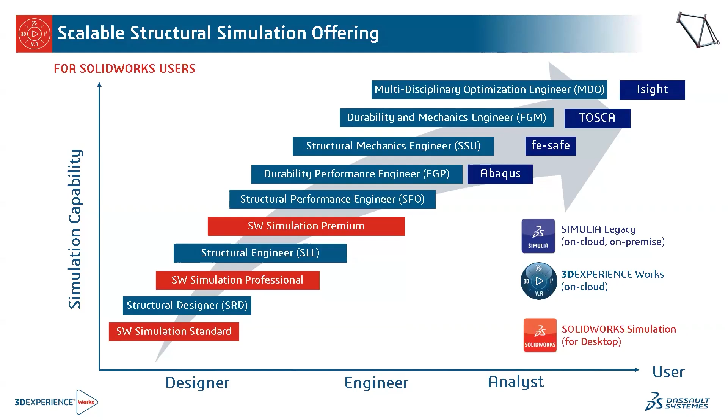So durability simulation is contained in a role that is among the strongest structural simulation capabilities. If you're familiar with SOLIDWORKS Simulation Premium, then this role is at the premium end of Simulia's portfolio, analogous to that, with a more robust set of tools, elements, kinds of simulation, and computation alternatives.

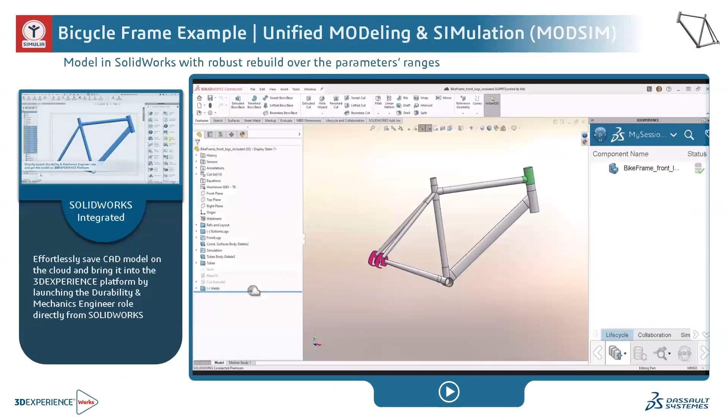So to begin with, I'll just go into SOLIDWORKS a little bit. Here I'm using the rollback bar on a SOLIDWORKS model to show the history-based parametric solid modeling. One thing in particular to democratization is preparing your SOLIDWORKS model for robustness over the range of values available to users. I'm clicking on this thicken feature just to show that I'm creating the gusset from the tube surface there. Just rolling it forward.

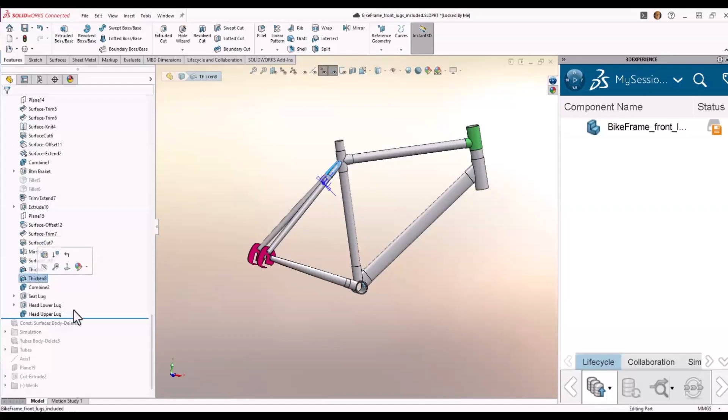So I've also got a layout sketch here that is sort of the skeleton of the rest of the model. And I've used this in my model to basically make it easy to find everything so that everything I want to change is in one place. And that way, when I want to test for robustness, testing the dimensions values through their extrema, so that my geometry always rebuilds, is a big takeaway from this. And you can avail yourself of the parametric solid modeling strength of SOLIDWORKS to accomplish that robustness.

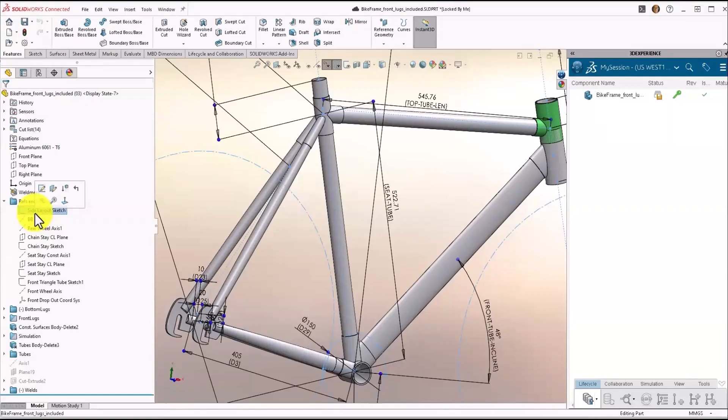I will suggest one possibility is to use a design table to quickly identify the coordinates of values that cause the geometry to fail at first, and then from there resolve so the model behaves as predicted over the range of the parametric values.

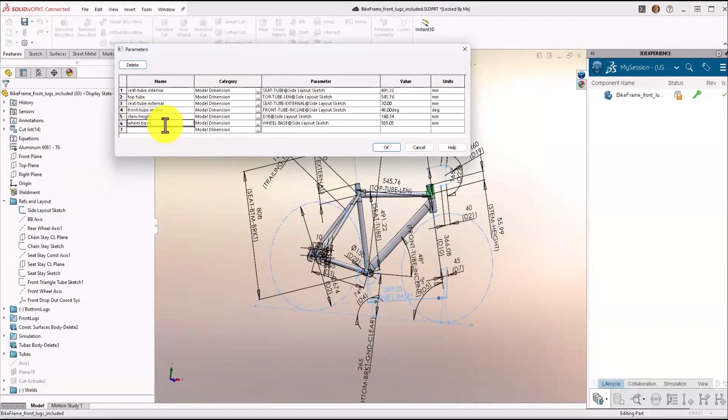And then from the equations object of the tree, I've gotten into the parameters dialog to basically add parameters and associate those parameters to the dimensions so that when you make a change to a parameter's value, the dimension changes and the dimension drives the geometry change.

And just to note, the integration to the platform is within SOLIDWORKS. So it's very easy. You don't have to worry about creating STEP files or things like that. And you'll get the geometry into the platform, and a change made in SOLIDWORKS can be cascaded very rapidly into the platform. So changes are totally associative.

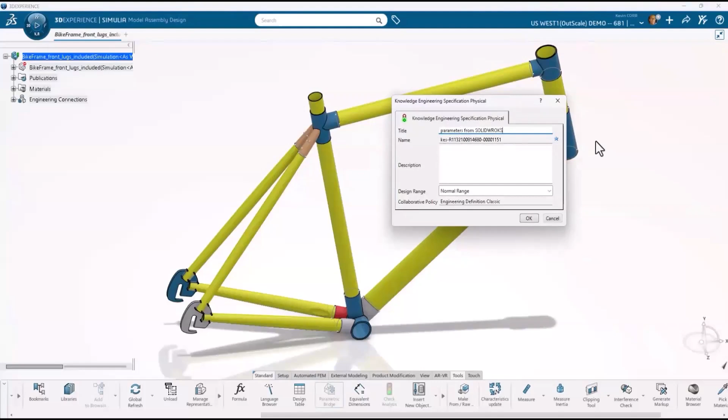And not only are they associative, but they're also bidirectional, so that using this parametric bridge, I can create a little knowledgeware object, as it's called, on the platform, to basically keep the parameters in the specification tree over at the left. So as I finish correcting my spelling, there's my object over in the upper left.

You can see there as I expand the relations in the parametric list there. And I can come in and just maybe add a range to the parameters so that the user knows what the range is and they can easily stay within that range.

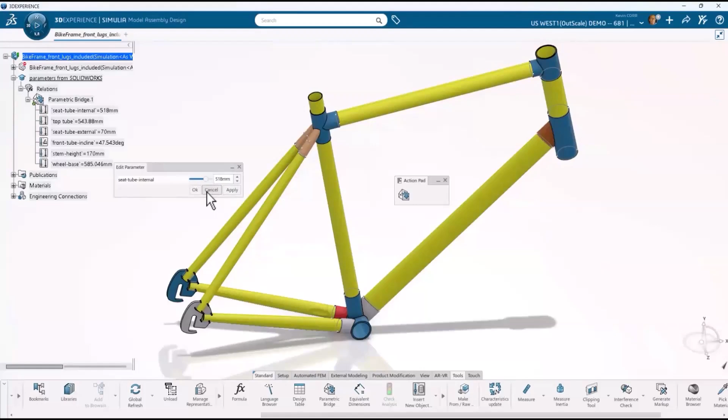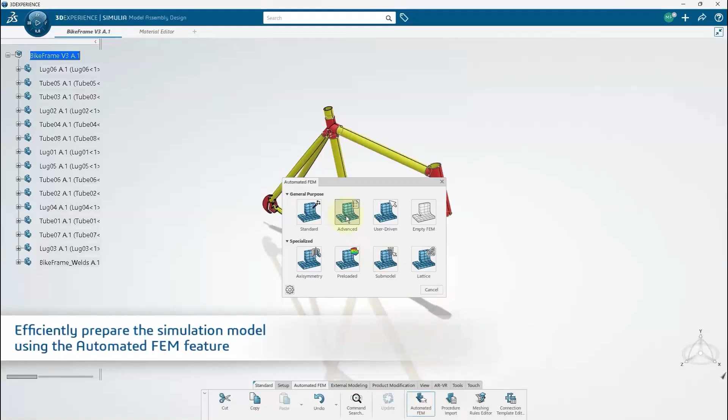So parameters varied by a casual user are easily done in the 3DEXPERIENCE tree. So next, I'll use the power of our automation capability to automate creating the meshes, assigning material properties, and doing the mid-surfacing on which we'll create those meshes. And then we'll put some connectors across those meshes so that you have a weld established.

So here I'm just automating the process of meshing everything by specifying the various parameters. Going to use a surface quad element topology. And there's my mesh. So automatically create mid-surfaces and meshes for quick simulation model builds.

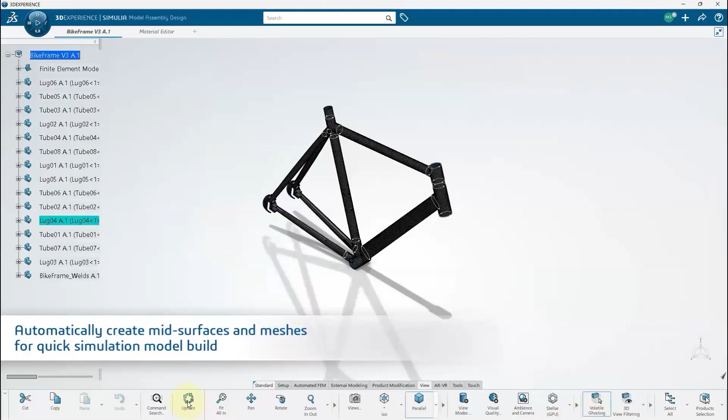Also, mind you that you can basically replicate your meshing wisdom off to your colleagues by allowing them to access your presets, which is a huge multiplier in time savings for them.

And here I'm using our auto detection tool, which allows us to automate the possibilities of creating a connector between the tube and the gusset. And you'll see that it can do many at once.

It's very powerful because it not only allows you to create a weld mesh, but also create the transition zone between the tube and the weld, and then the weld and the gusset, so that it automatically creates a transition zone or a mesh gradient, so that optionally you can have a nice gradient into that weld zone.

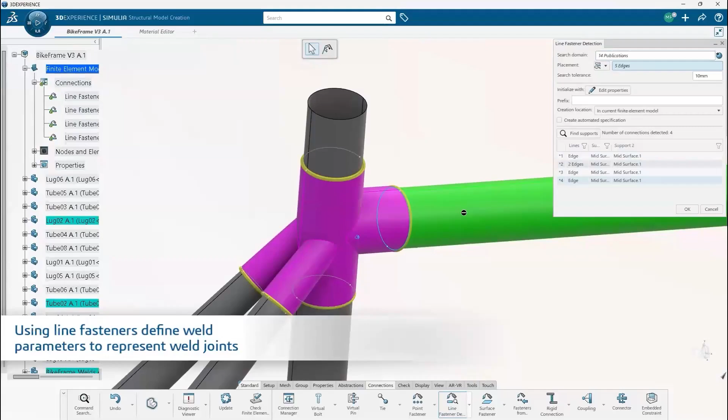So speaking of welds, I thought I'd go into a little bit of detail, not too much, but maybe a minute or so of what is the importance of durability simulation. To understand the importance of durability simulation, I thought maybe we'd take a minute to consider an example published by a car maker at the SIMULIA Customer Conference. Here we're looking at a car suspension knuckle.

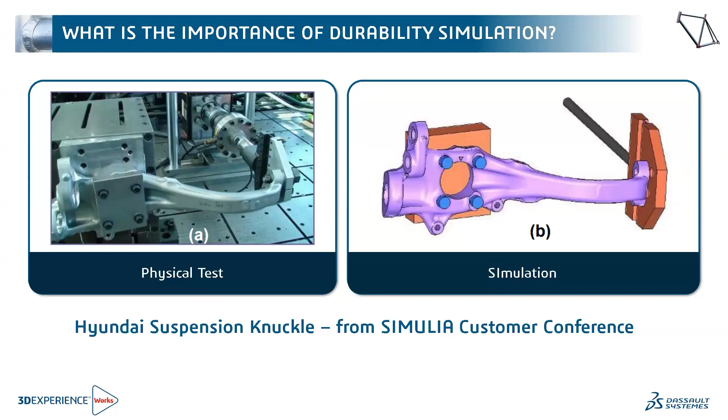Let's compare the failure locations, physical test against simulation results. So in this particular case, the car maker had a low-level loading, presumably to represent the normal expected loads in the road exciting the structure. So in the physical test, the knuckle breaks near the mounting holes. And in the analysis, that same location is predicted. So this would be the location of highest stress.

As a fully reversed loading, this could be predicted just from the strength analysis or the FEA. Then an overload case, presumably to represent an extreme event such as the curb strike, is tested. Repeating this, they get the failure near the mounting bolts in the test, which again is predicted from the analysis. But then they do a single overload before repeating the low-level fatigue again.

At that stage, with everything we know so far, where would we predict the failure? At the mounting location. It's the highest stress location. It has the lowest life in each individual case. So combined, this must be the worst location. However, the car maker knew from their tests that this loading caused failure in the arm away from the mounting locations, a result which cannot be predicted from just the base FEA strength analysis load cases and just combining the damage.

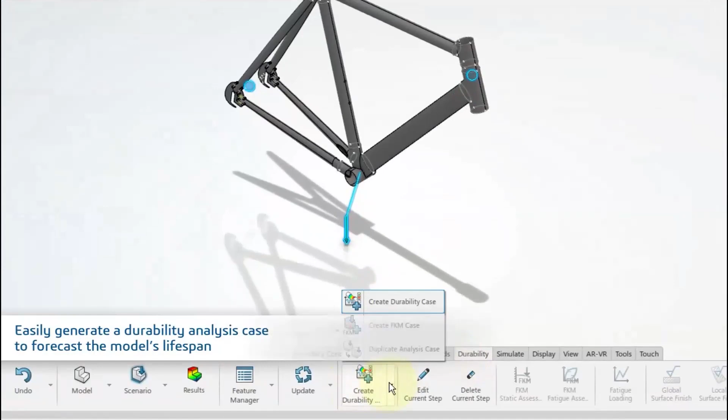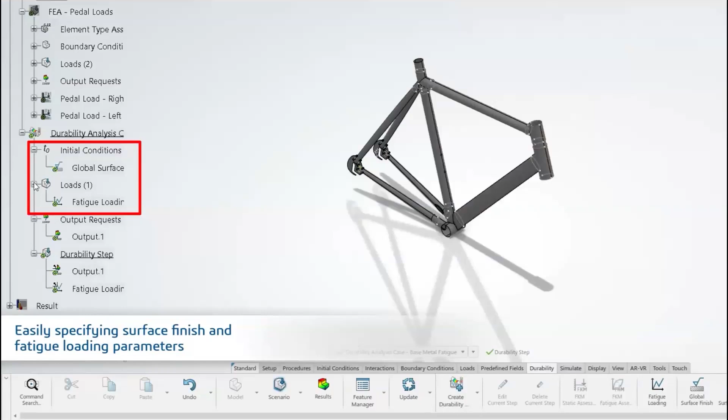So things like surface finish and the sequences to be superimposed are input in the fatigue loading. And by the way, if you have transducer data from measurements using accelerometers and strain gauges, you can import those and they can become references in traceability.

So I'll use base metal fatigue as a guide for identifying areas of interest for downstream weld fatigue. And here's our results for the base metal fatigue. This basically allows you to see at a glance what the expected life is, sort of without using the welds as a topology.

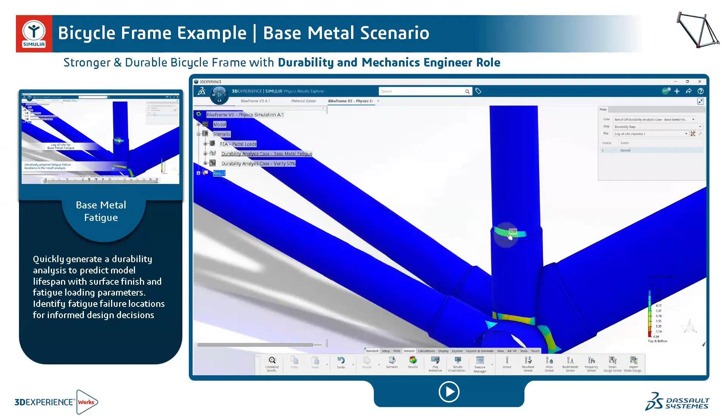But first, let's just explore why do weld fatigue? Well, the reason to do weld fatigue is that the base metal fatigue isn't so conservative as it should be for welds. Welds have a very specific geometry, and so you can get a lot lower fatigue life. So that's why you'd use some sort of code that embraces weld fatigue.

The vast majority of people out there are doing only toe failure analysis driven design. With our roles, you cover all modes of failure.

We assume as-welded, without treatments, in the fatigue curves. So you might do shot peening or something like that. Some of our customers do, and they develop their own SN curves for their own welding processes. If they are routinely grinding the toes, they have proprietary standards that can be used. But out of the box, the assumption is that residual stresses are pretty near the yield stresses, and that means SN curves have near yield built in.

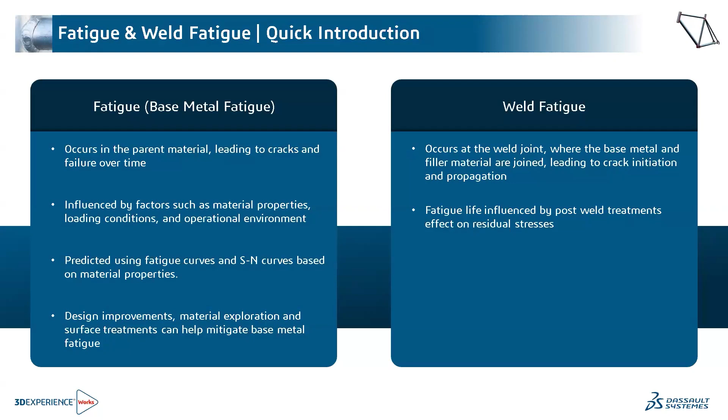Along that line, there are options in our curves available to you for Battelle compressive. So there are definitely—if you want to model right now out of the box, you've got the capability to do weld fatigue comparison against less conservative fatigue curves.

And this just illustrates all the types of failure that you can simulate. What we'll do here basically just picks the lowest life from the analysis and the boundary conditions, and the combination of material distribution and load distribution, to find what the lowest mean fatigue life is for any of these toe failures, fusion, or root, for instance.

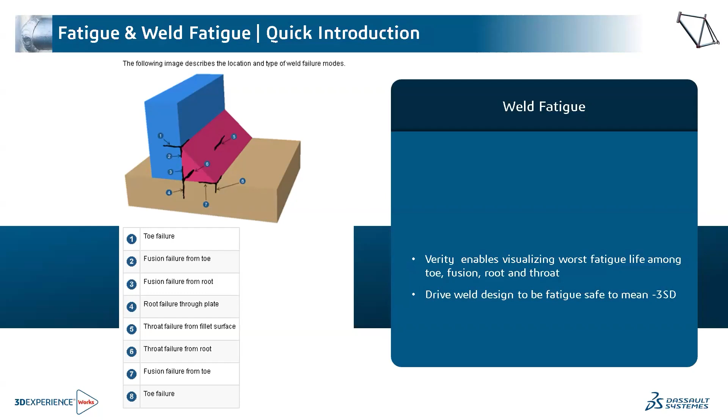And so with Verity, the value of the post-weld treatments can be simulated. Think of comparison of the results, SN curves from Battelle residual compressive stress testing, or get a sustained contrast between life of stitch welds and all the way around welds, for instance. We enable you to design with a basis in simulation of the typical failure modes before committing to welding.

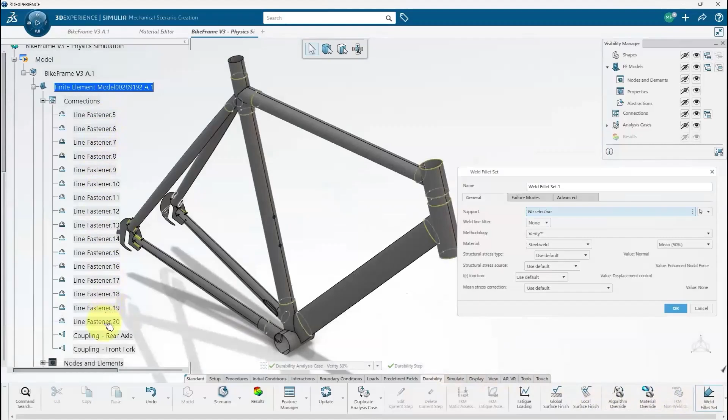I'll go ahead and collect the welds here in the weld fatigue dialog box. So all the welds, all those line fasteners that I created—that's what they're called, the weld connectors. This is also where you can opt to choose from among the ASME or BS7608 or Battelle compressive loading to compare against the combined loading and material distribution that produces the mean fatigue life.

And this is all courtesy of our Verity weld fatigue simulation tool. You can compare here the log of life considering the Verity, and also the contrast between that and a side-by-side comparison with base metal fatigue.

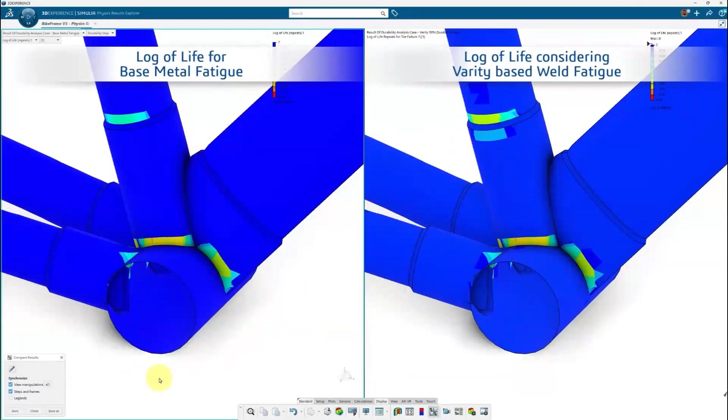This all happens very quickly, especially with this kind of a mesh. It's very suitable for democratization and optimization types of analysis.

This scenario for fatigue simulation is probably somewhat advanced for a casual user to just get done right the first time. Yogesh is eager to show how to put your choice of tuners, sliders, and adjustments to parameters in front of a casual user, making them independent even with this more advanced analysis. So at this point, Yogesh, welcome to the stage.

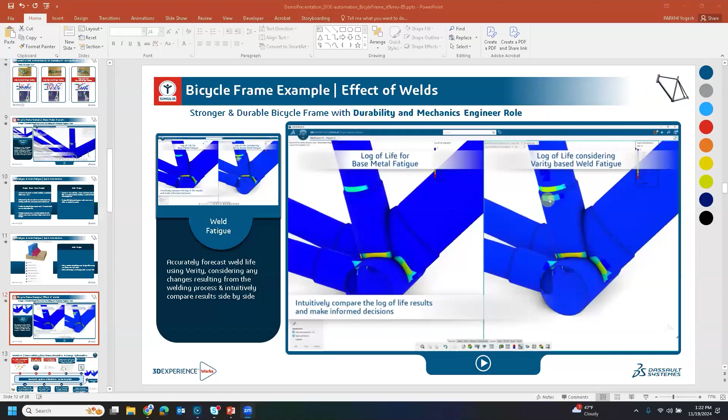All right, thanks for the introduction, Kevin. Let me share my screen. Sure. Okay, do you see the slide in presentation mode? Yes, I do. All right, thank you. Okay, hello everyone.

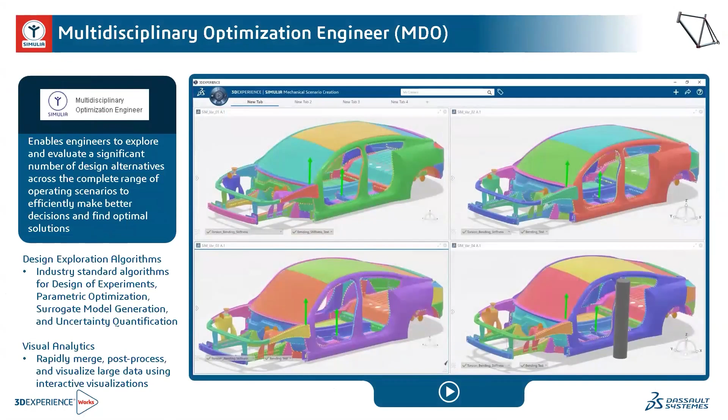Now, just to give you a brief overview of the MDO role, it not only does the simulation automation, but also allows design exploration and optimization to find best design alternatives that meet the product requirements.

We have a variety of industry standard algorithms for DOE and parametric optimization, which enables engineers to systematically explore the design space, perform what-if scenarios, and also find the critical factors or design variables that impact the product performance.

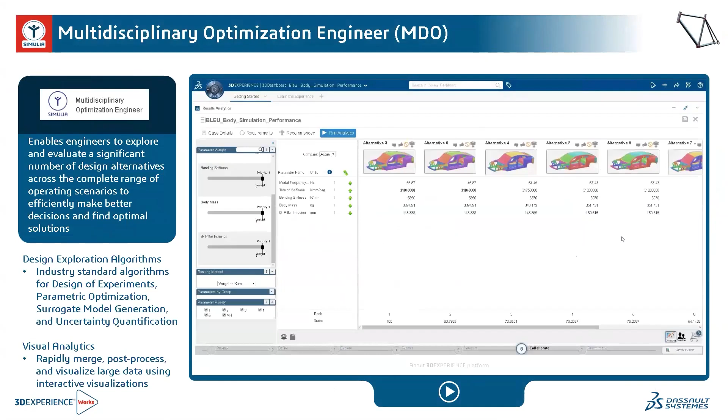And also, as you can see on the screen with the advanced visualization tools, users can rapidly merge, post-process, and interactively analyze large data sets, which helps users to evaluate design options faster and with greater clarity.

Now, to automate the bike frame simulation workflow using MDO role, a simulation expert will first create a template that exposes only the parameters that the designer is allowed to modify, which eliminates the risk of errors.

It's not that if accidentally a non-expert user changes something, that will either give you convergence issues or give you a completely different result.

So with web-based simulation, the simulation expert is kind of making sure that the designer or the user will not accidentally change the parameters or define a value which is kind of out of range.

And once the expert creates the simulation process and develops a web-based template, and once the simulation template is released, a designer will use that template and run a simulation from a web-based dashboard instead of using a native client. And once the simulation is complete, the user can review the results or review the KPIs directly within the web-based app.

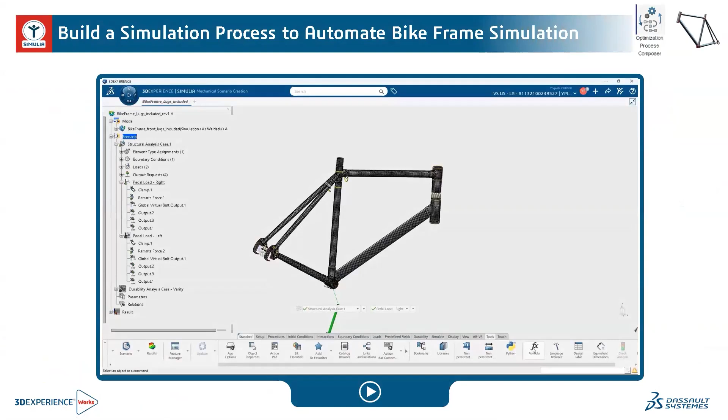So this is the same bike frame that Kevin has used to build his weld as well as the structural scenario. So what I'm going to do is, apart from the parameters that he imported from SolidWorks, I'm going to create two additional parameters: one for the rider weight and other for the tube thicknesses.

So here, as you can see, I have defined a baseline value as well as the range that the designer can play with. So this is the range for the rider weight.

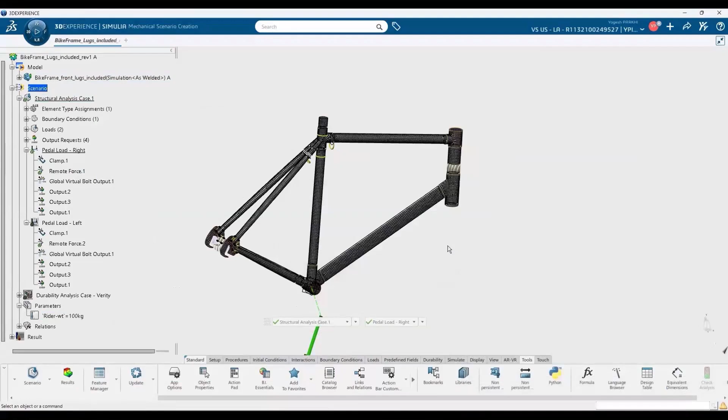And once you create this parameter, you just need to assign that parameter to an appropriate feature. So in this case, I'm assigning that parameter to the load input. And similarly, the tube thickness parameter which I have created here, I'm just assigning to a thickness input in the section definition.

So here I'm just assigning the parameter. Creating the parameter is also very easy on the platform, as you can see.

And once I assign the parameters, I just want to make sure that the parameters that I assign, the simulation is running just fine. So now the simulation is completed.

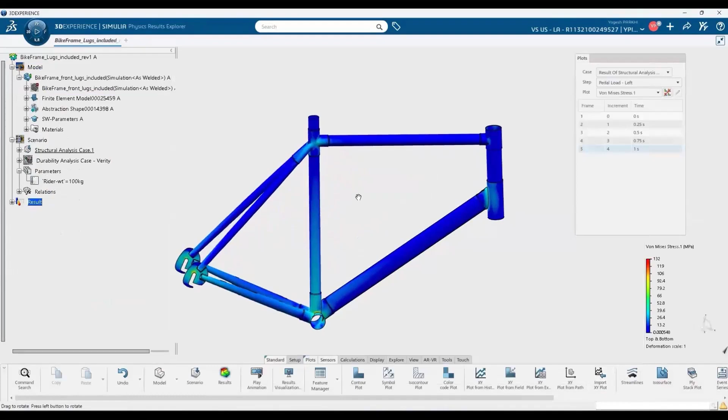I'm going to go to my multidisciplinary optimization engineer role, and I will launch the optimization process composer app to automate the simulation process. Now here, as you can see, building a simulation process is fairly easy.

All I'm doing is just dragging and dropping the physics simulation adapter onto the process. And that's the only component we need to automate the simulation process.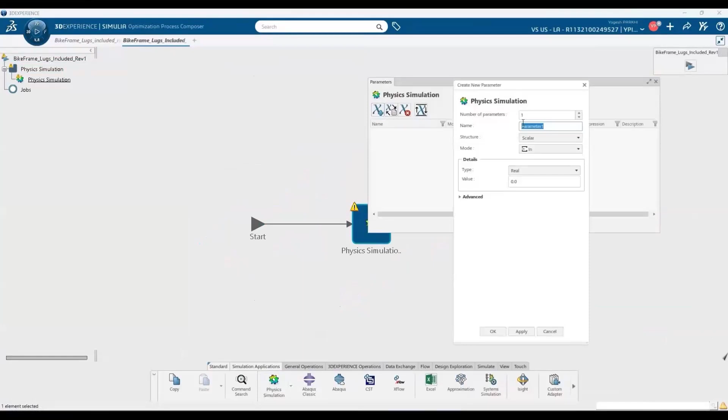So here I'm just creating a parameter which is an object parameter in which I'm going to read my simulation results. So I'm selecting the bike frame simulation.

And now I'm going to edit this physics simulation adapter. Here I'm going to define on how many cores I want to run the simulation.

And here I'm selecting the single solve mode, meaning that I'm going to run the simulation and save the results in this simulation object parameter.

And lastly, I'm selecting upload the images. So all the contour plots such as the von Mises stresses, displacement, or life fatigue life contour plots will be uploaded as a content of this activity. So that's why I'm selecting this upload generated image.

The purpose for doing this is because when the simulation expert is going to create the template later on, he can use these contour plots in the simulation template, so that when the user uses this template, he can dynamically see these results when he runs the simulation.

In the inputs, I'm just going to select my design variables. So here, apart from the parameter which we imported from SolidWorks, I'm going to use one of the parameters, which is the seat tube length. And then I'm going to use tube thickness, and also I have selected the Young's modulus.

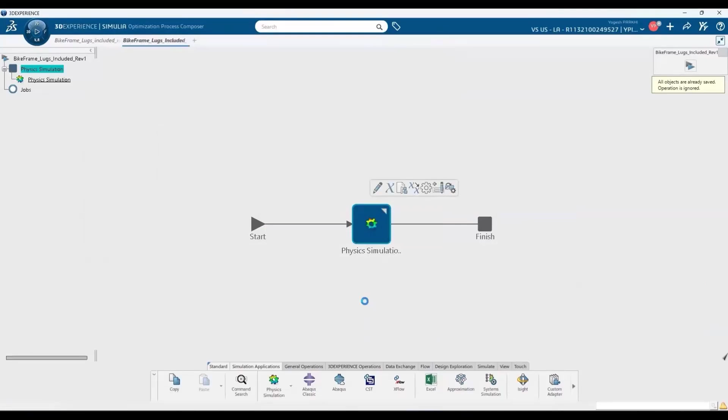And once you set it up, as I said again, all we need is just the physics simulation adapter to automate the simulation process. Also, setting up the adapter is fairly easy. And once you're done with it,

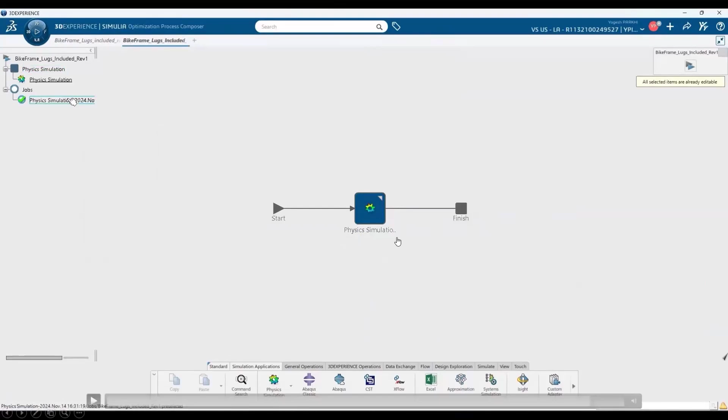I'm just running the simulation process, making sure that my simulation runs fine from the optimization process composer app.

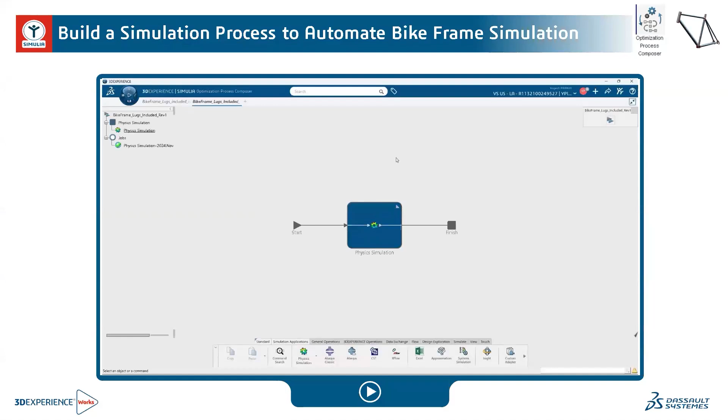Now that we have built the process, the next step for the simulation expert is to create a web-based simulation template.

So in order to create the web-based simulation template, the expert will go to the dashboard, and from the dashboard we will launch the Process Experience Studio app. So here I'm just creating an empty dashboard, and I'm dragging and dropping the Process Experience Studio app, which is required to create a simulation template.

Now here I'm just creating a new simulation template, and as an input, I'm going to use the simulation process that we have just created, using the Process Composer app.

And once we do that, it launches this app where we see all these different components that we can use to create our web-based template.

So here I'm just creating different sections. Initially I'm just using the simulation process name as the title. This is just for the methods developer's reference, meaning that when a designer uses this template and gives any feedback, the methods developer should know which simulation process he has used to create this template.

And then I'm going to use all these different components, like inputs and sliders, to define our design variables. So again, the design variables are the tube thickness and the seat tube length, and here you can see that for seat tube length I have defined the range also. So the user cannot input values greater than 550 or less than 500 millimeters.

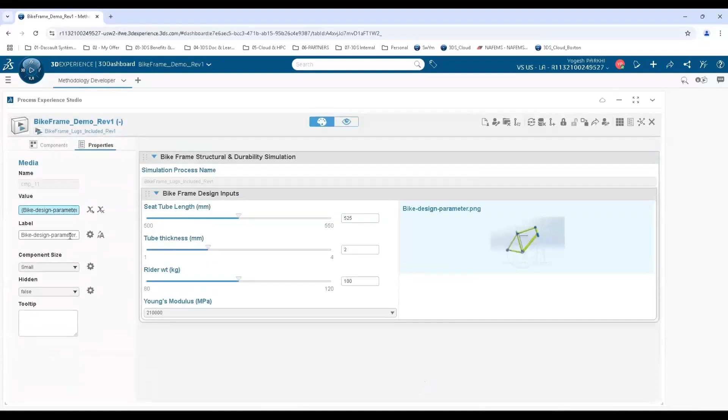And similarly, I have created the parameters for tube thickness, rider weight, and the Young's modulus of the material. After that, I'm going to use the image that I uploaded in the simulation process as content. As you can see, this is the bike design, the bike frame, and it shows what the seat tube length parameter is.

And after that, for the responses, I'm going to use our KPIs, which is nothing but von Mises stresses, the log life, and the bike frame weight.

Now, one thing to note here is that I have set the read-only parameter to true, meaning that the designer or the non-expert user, when he uses this template, will not accidentally put any values here. Since these are read-only parameters, they will only get updated when the simulation process is completed, so the user will not have access to these. The only parameters the user can vary are the 4 parameters that we have defined in the design input section.

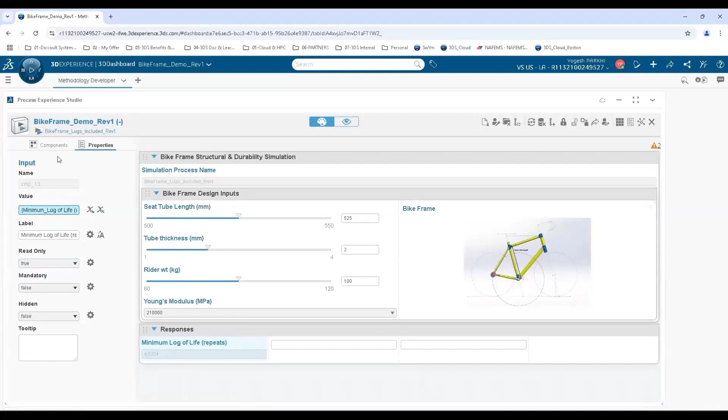So I'm selecting all the responses, and then I'm also uploading the simulation object parameter. This simulation object parameter is nothing but our simulation. Once you run the template, this object will get updated and the user can dynamically view the results in the physics simulation review app. So here, as you can see, I have also uploaded the static images of the different contour plots.

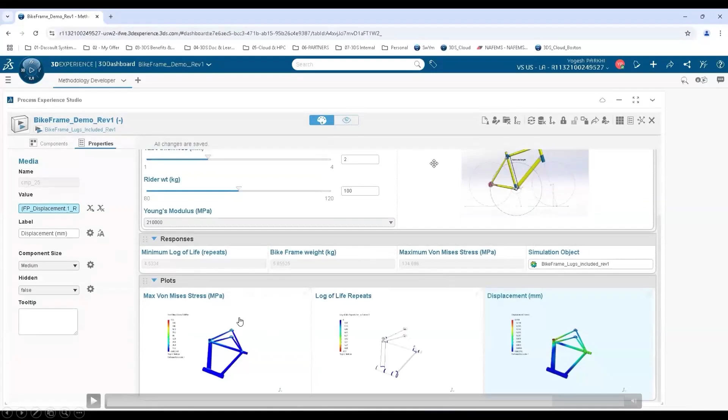And once the developer is happy with the look and feel of the template, he can go ahead and release this template. So I'm just changing the PLM status of this template. And as you can see, once the template is released, the template is now available only as a read-only option. So even the developer cannot make any changes in this template.

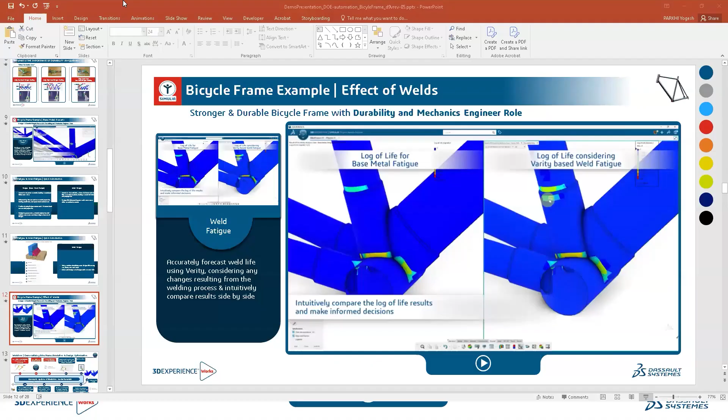Now, once the template is released, I'm wearing the hat of a designer or a user who is going to use this template. So to do that, let me just go to the dashboard where I have created this empty dashboard. And I have these 2 apps, performance study app. So I just drag and drop this performance study app on this dashboard. And similarly, I have the physics simulation review app.

Now, in order to run the template, all the designer will do is just look for the template that the developer has released. So I'm just searching for the template. This is the template. And the user will simply drag and drop this template on the performance study app. So now the template is getting instantiated. And once the template is launched, we can see the template that the developer has created. And we can also see what are the design inputs and the responses. So here you can see that the template is instantiated successfully.

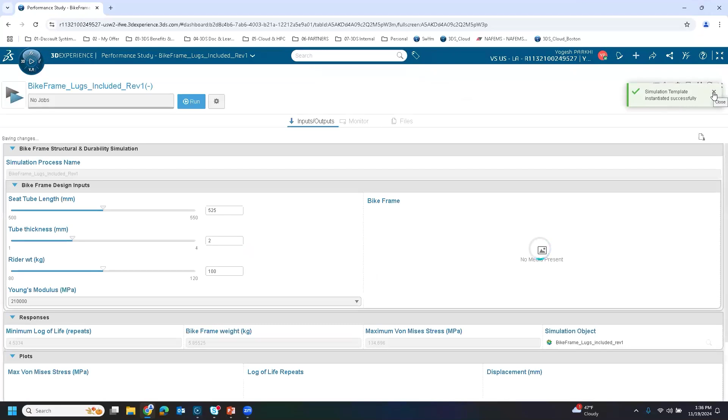So as you can see, I can just maximize this bike frame image. This is the seat tube length parameter. And you can either input the values or you can use these sliders. So let's say I want to run a simulation for seat tube length of 550 millimeters. Now let's say a designer accidentally inputs a thickness value larger than the range. Let's say I put 6 millimeters.

Immediately the template throws an error. It says please correct the errors. And if I click on this error, it says please ensure that the value is between 1 millimeter and 4 millimeters. So this guides the designer and makes sure that he or she does not make any unwanted mistakes.

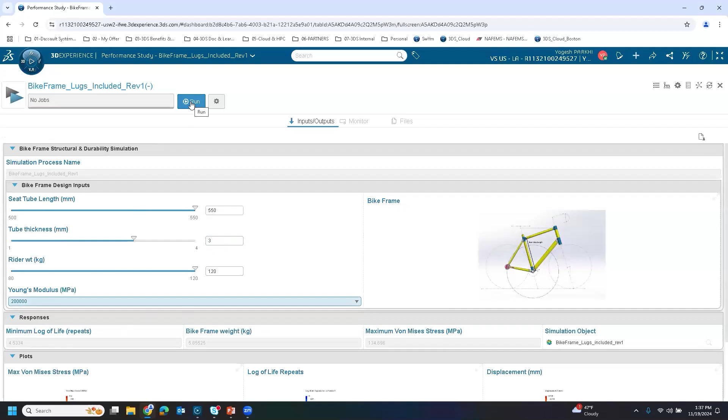So here I'm inputting the tube thickness as 3 millimeters. I'll just use rider weight as 120. And here I have the drop down, so that I can use a different steel grade with appropriate modulus. So once you do that, we just wait for saving the changes. And once all the changes are saved, the user will simply hit run. So in the interest of time, I'll show you what happens when you hit run. So let me go back to the presentation.

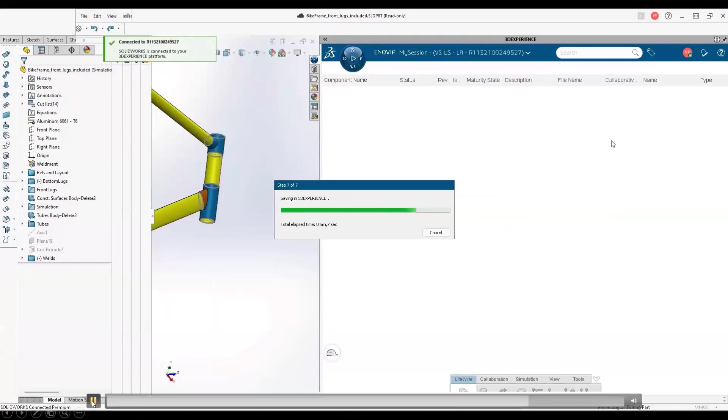Okay, so here I just instantiated the template. And now when we hit run, SolidWorks gets launched automatically in the background. It updates the CAD as per the design inputs. It saves the model on the 3DEXPERIENCE platform. Along with that, it changes all the design inputs that we have defined, that is the tube thickness, rider weight and the Young's modulus. It will run the entire simulation.

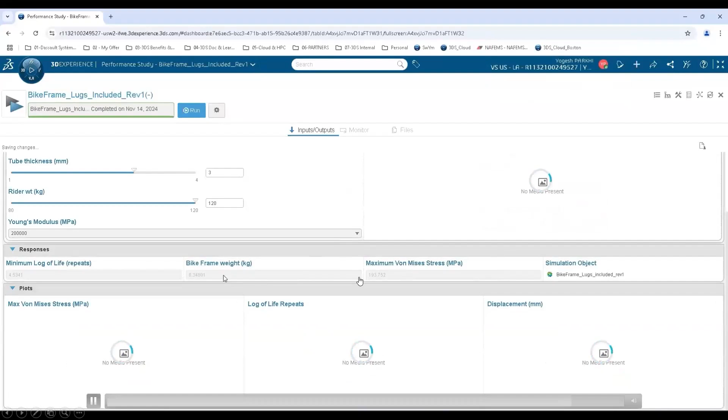And as you can see, since the simulation is running right now, the maximum von Mises stress is 134 MPa. And once the simulation is complete, you can see that all these KPIs have been updated. Now for the new design inputs, the maximum von Mises stress is close to 190 MPa. And it also updates all the contour plots. So now we can see the static images of this contour plot in the simulation template.

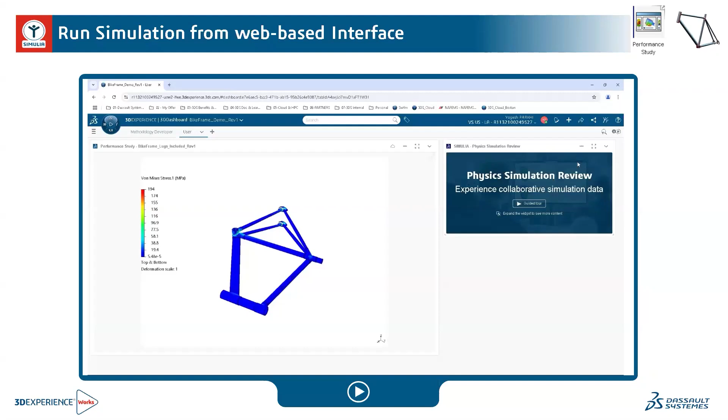So now you can get a sense that even though a designer or a user is not familiar with the process, or doesn't know how to set up the weld fatigue, or how to create a mesh or create a scenario, within a few clicks he or she can run this advanced simulation and analyze the KPIs. And once the simulation is complete, let me just go back to the dashboard again. As I mentioned earlier, you can view the static images of the contour plot, or the user can just drag and drop this simulation object in the physics simulation review app.

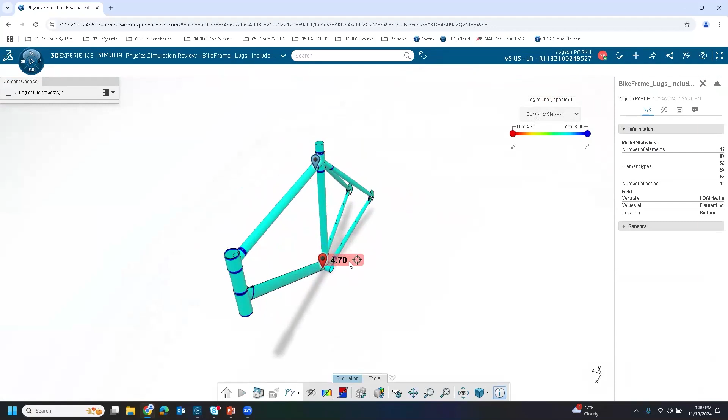So the simulation is now getting loaded. So this is a lightweight visualization where we can quickly view the results in 3D. So this is the log life contour plot. We can see the min and max. What is the lowest fatigue life? We can just zoom in and see where the fatigue hotspot is.

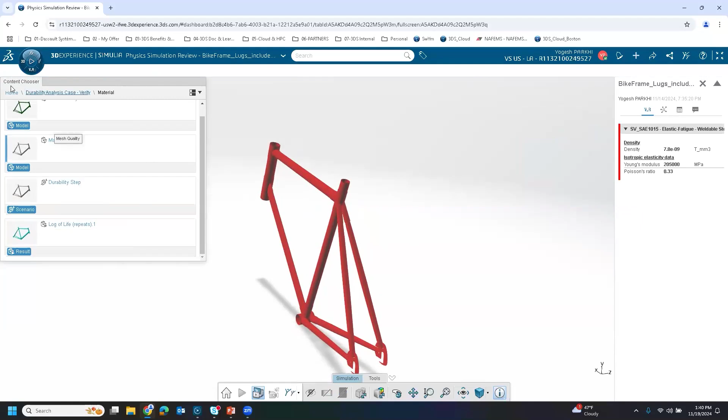Also, you can view the model information. So if I go back to the home, you can see what is the mesh quality, what material we have used for this analysis. Again, for the structural analysis case, I can see what was the scenario setup, how I have applied the load for different load cases. And also I can see the displacement and the von Mises stresses.

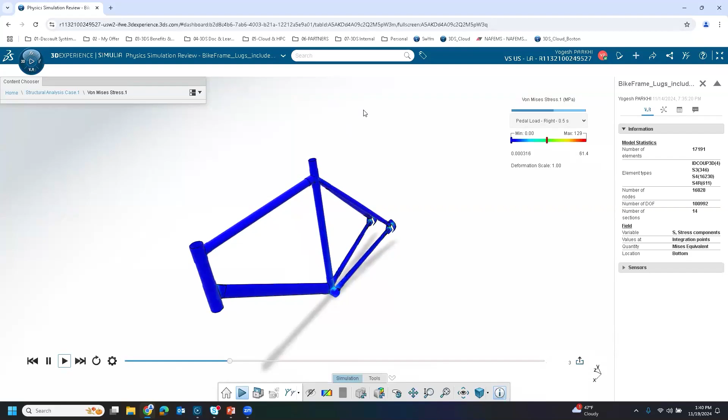And you can also play the animation. So you can quickly post-process the results in this lightweight visualization once you run the simulation from a web-based dashboard. Again, we did not open the native or the rich client to run any of the simulation. I just open the dashboard in Chrome or a web browser, and I'm just running this simulation from the web.

And also, if you want to do further post-processing, you can always open this simulation object in the Physics Results Explorer app in the native client.

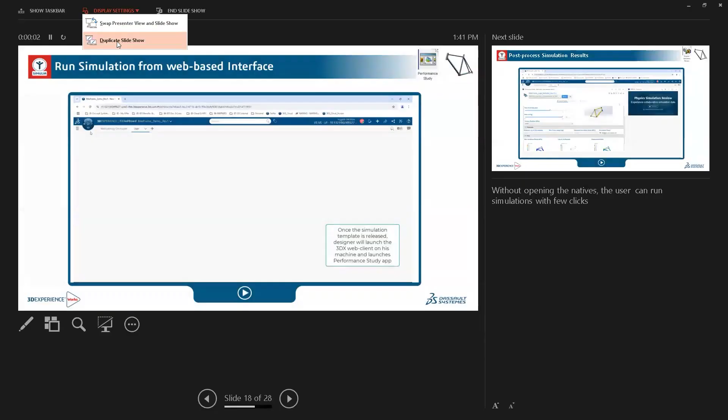Now, so that's about post-processing. Now, let's say if we want to optimize the design, or explore the design space, even that workflow can be automated using the same process. Meaning that the simulation expert will build the simulation template and release the web-based simulation template. And after that, a user will use that template to run the simulation from a web-based dashboard.

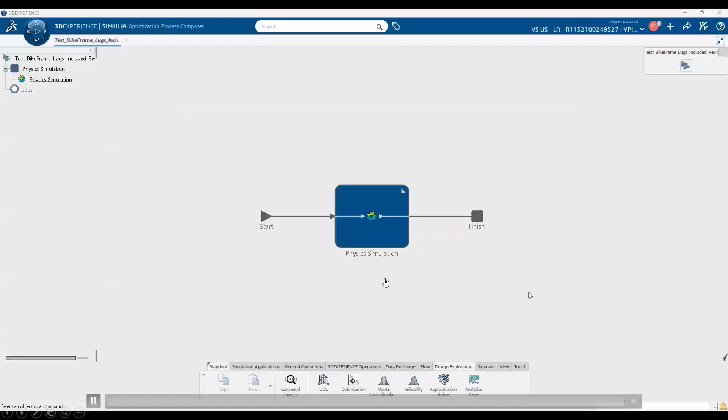So let me show you the process for how to automate or democratize the DOE study. So here, this is the simulation process that we created earlier. Now all we are doing is dragging and dropping the DOE adapter onto the simulation process. All right. So here I'm just dragging and dropping the DOE adapter onto the simulation process that we created earlier.

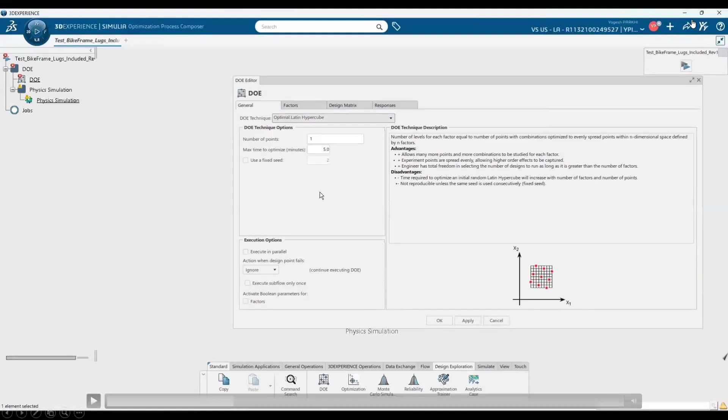And now once we select the appropriate DOE technique, I'm just parameterizing the inputs that we can change in the simulation template. So number of points is one parameter that I just mapped to a parameter. And then in the factors, the design range or the parameter range is something I'm going to parameterize. So when we create the simulation template, the user can change this design range to run a DOE study. And for the DOE responses, I'm going to minimize the mass and maximize the fatigue life. That's going to be my objective.

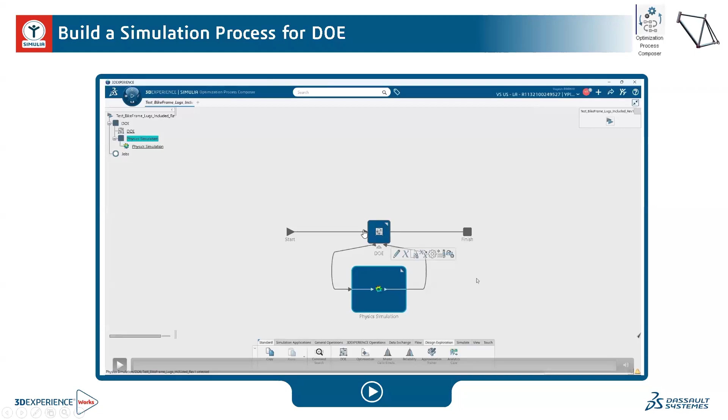And since we are running multiple design points, I'm just going to make sure that I use this low disk usage option. And with that, once this DOE process is ready, I'm going to create a simulation template. Now the simulation template is going to be similar to what we did earlier. I'm going to use all these inputs and slider components to create the upper and lower ranges of these parameters, so that when the user instantiates this template, he can just define the range and the number of design points as input to run the DOE study.

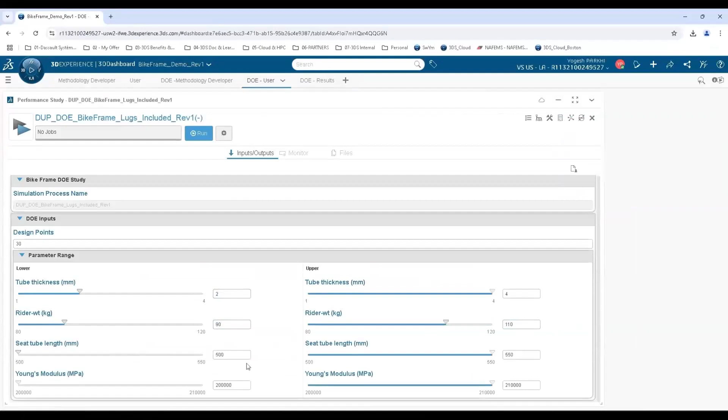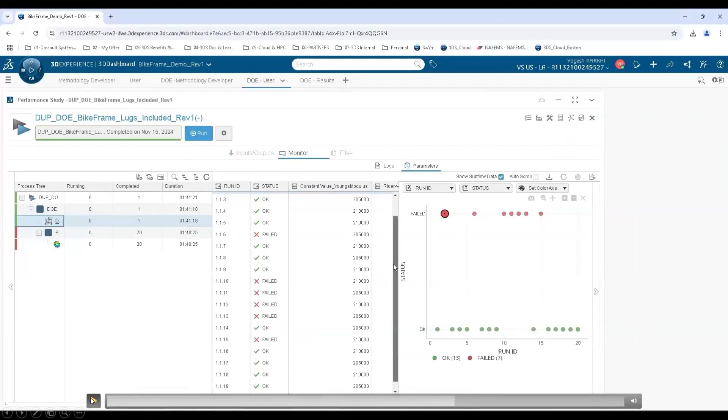So again, when the methodology developer releases the template, the user is going to drag and drop this template in the performance study app, and the inputs are going to be the range of the parameters and the design points. So here I'm just using 20 design points to run a DOE study, and that's pretty much it. You just hit run. The DOE study will run in the background. The process will automatically update the CAD as well as all the design inputs, run the simulation as well as the fatigue simulation, and will give the KPIs.

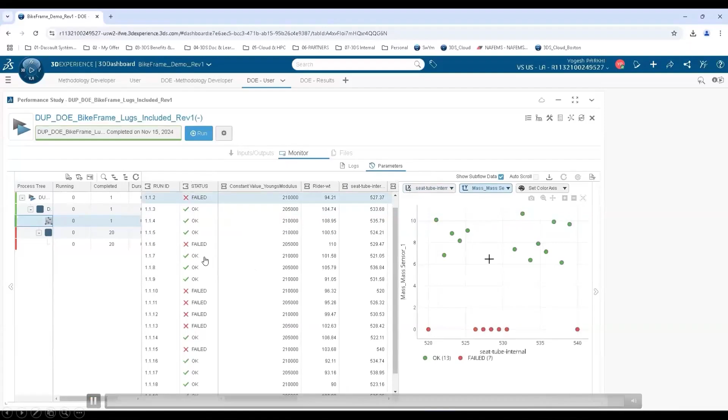So once the simulation is complete, in the monitor tab, you can quickly analyze the design points. It will tell you how many design points have passed and how many design points have failed. And also you can quickly plot a 2D scatter plot to analyze the effect of design parameters on the responses.

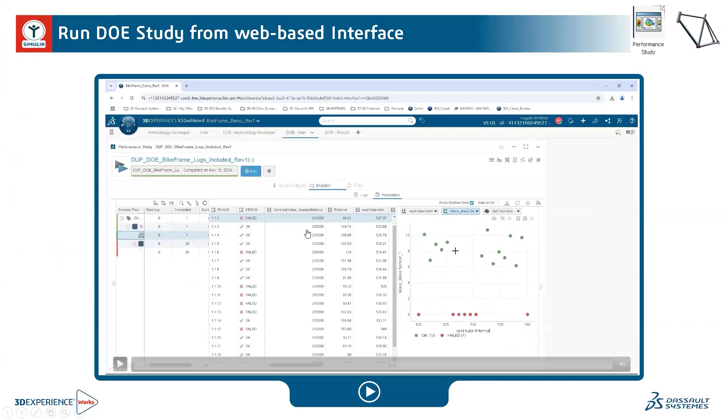So this is like the very crude post-processing you can do in the monitor tab. But to do advanced post-processing, we are going to use this Results Analytics app. So I'm just dragging and dropping the Results Analytics tab on the dashboard, and I'm dragging the simulation process into the analytics tab. And now in the guided analytics, we have the steps defined for the guided analytics.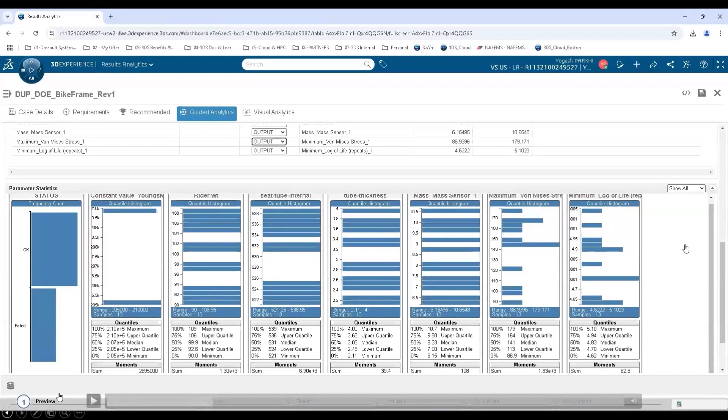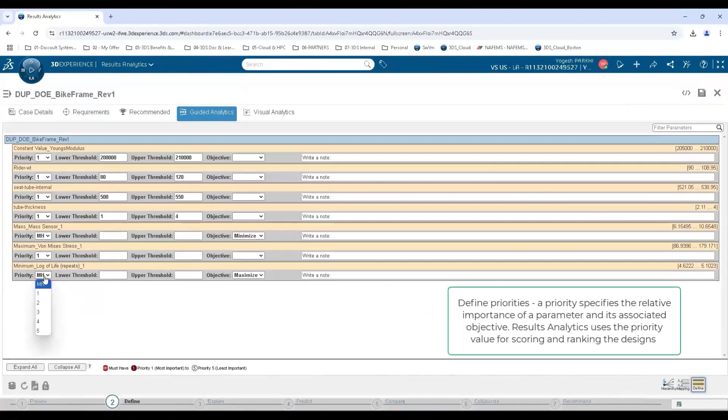After that, we go to the define step, where we can change the priority. Now, if you remember, in the Process Composer, we selected that we want to minimize the mass and maximize the life. And that's why it has the priority of must have. But you can also change the priorities. And changing the priorities will dynamically change the scoring and ranking of the designs.

Here you can see that we can filter this large data set by using the different filtering parameters. You can filter the data based on the parameter ranges, or also based on the scores or the feasibility. So here I'm just showing the top 5% of the designs. And now on the screen, you can see that the design points highlighted in green are the Pareto points, which are the most optimal design points.

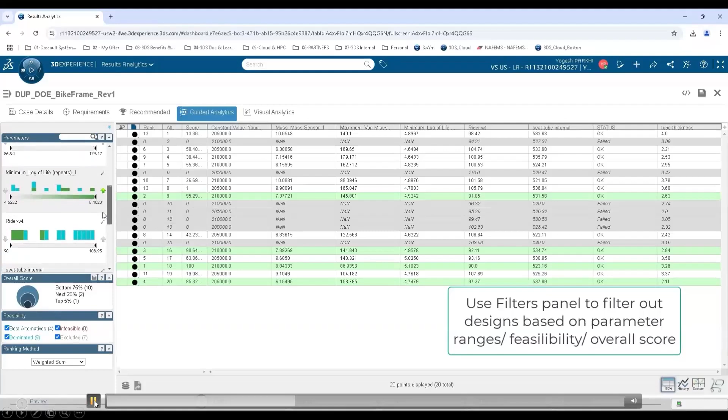The ones highlighted in white are the feasible design points that satisfy all the constraints. If we have any infeasible design points, then they will be highlighted in red. And all the gray ones are the excluded design points, or the points for which the simulation has failed to run. So here I'm just filtering the data based on the different parameter ranges. And after that, you can add the designs to the basket to compare at a later stage. So here I'm just adding multiple design points as favorites.

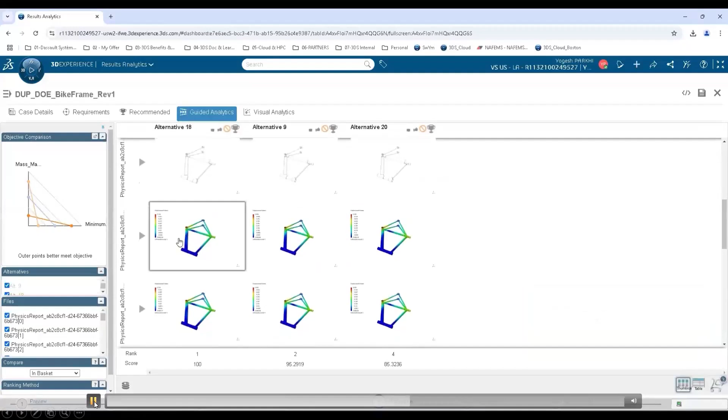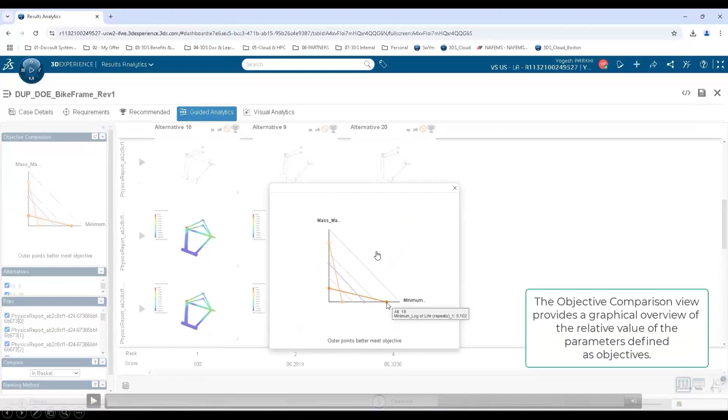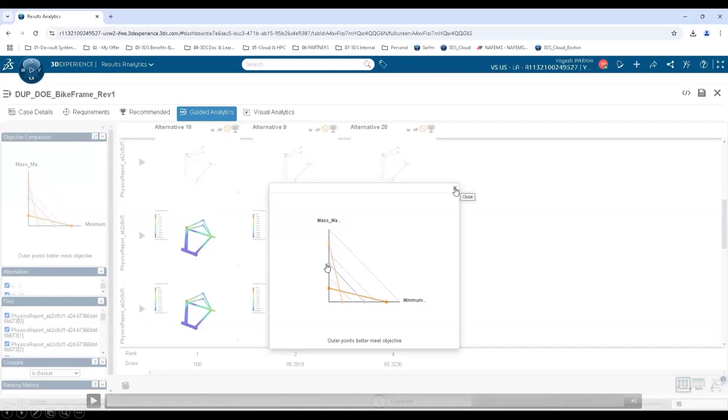And once I do that, I go to the compare step, where I can compare the alternatives side by side. Again, I can change the static images of the contour plot. And also I can use something called the objective comparison. Now here, as you can see on the screen, the outermost points better meet the objective, meaning that in this case, design alternative 18 has the maximum fatigue life, but it also has the maximum mass. Whereas design point 20 has the minimum mass, but it also has the minimum life. And therefore, I'm selecting design point 9, which is somewhat in between design points 18 and 20.

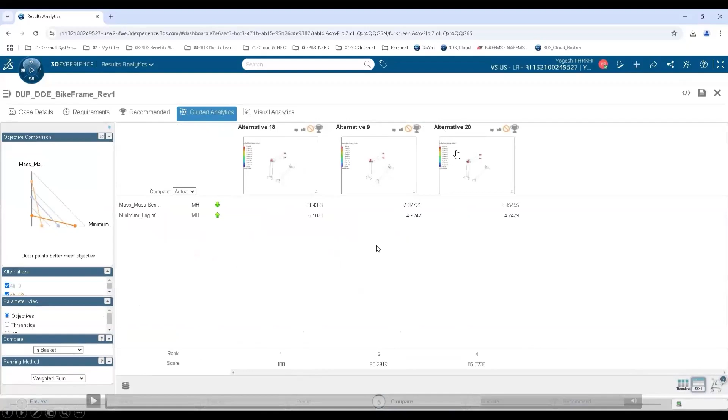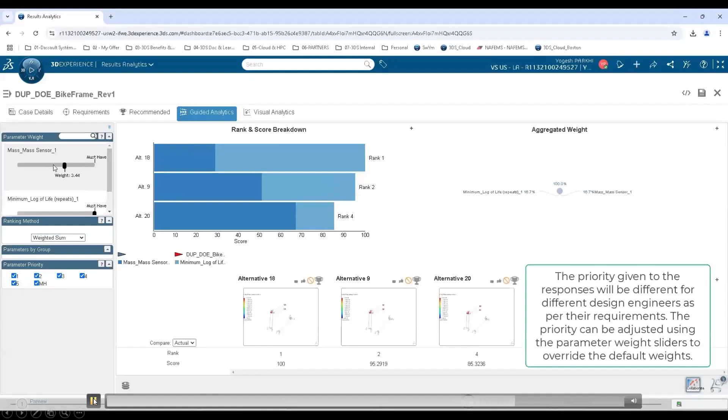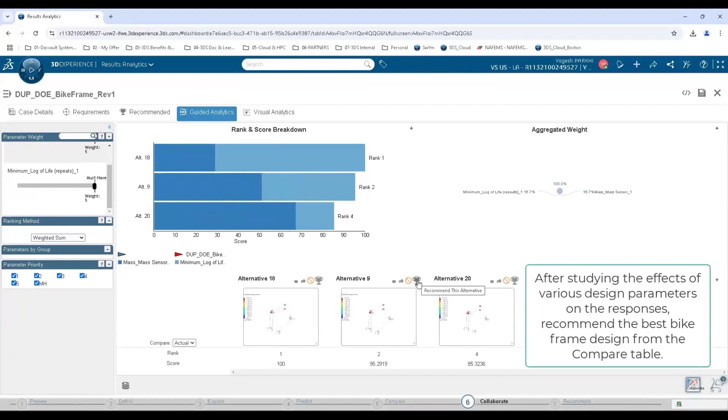You can also see these results in the table format if you click on it. And as you can see, design alternative 9 is somewhat in between 18 and 20. And lastly, you can go to the collaborate tab, where again you can change the parameter weightage, and it will dynamically alter the rank and the score of the different designs. And based on that, after you study the designs, you can determine which is the recommended design. So I'm just selecting the recommended design here.

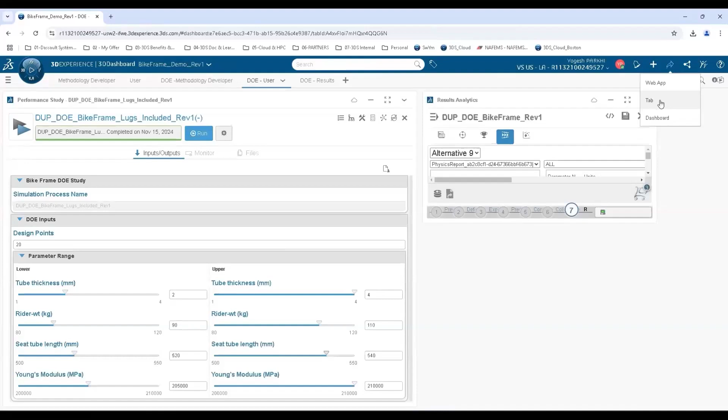And lastly, I'm going into the recommend tab, where I can add my comments. And you can share this tab or this dashboard with the other designers. And now the other designer can change the parameter weightage based on his or her requirements and find out which design best meets their goal. So here you can share the dashboard or the tab with other users, or you can share it with your managers for review.

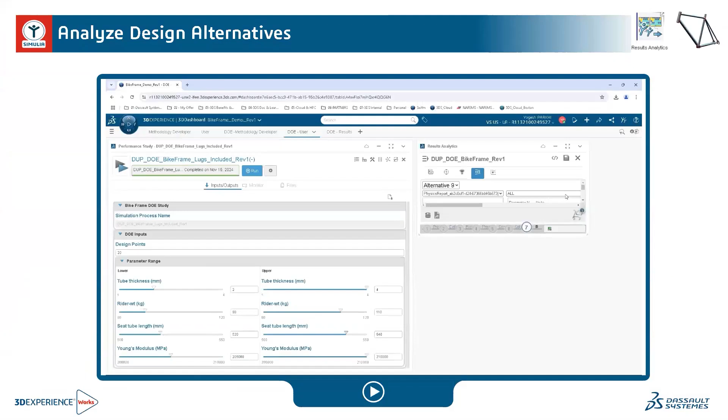So in summary, by combining the power of SolidWorks and the 3DEXPERIENCE platform, we can democratize simulation and really empower the non-expert simulation user to do these kinds of advanced simulations early in the design phase and explore the design space, which can help them optimize their designs very efficiently.